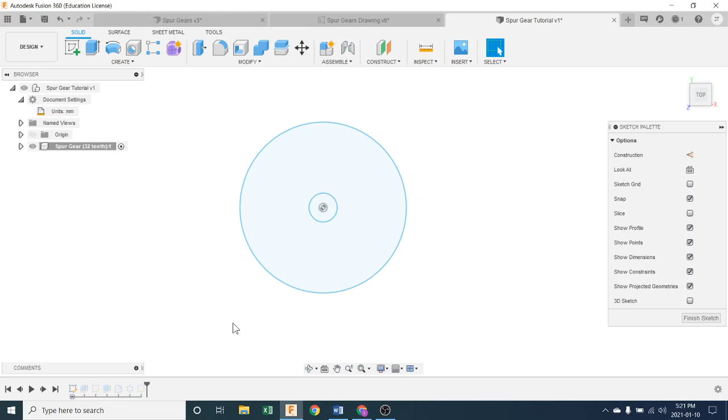Down in your history, yours is probably collapsed, so open up the group for our spur gear. The very first sketch, if you double click it, you can see this is where the circle for the bore was drawn. We're going to hit D on the keyboard and dimension that circle and make it a 6mm circle, since it was supposed to be 6. Hit finish and everything's good now.

Okay, next let's draw a second gear. So how do we do that? Let's look at it from the top, straight at it. Go up to create, then spur gear. Now a couple things we have to change.

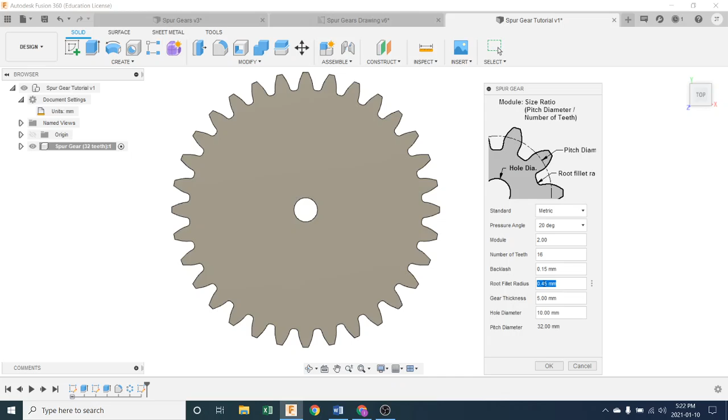The number of teeth is down here. You can see I was already playing with it, but yours would say 32 because that was the last gear you drew. You're going to have to change that to 16. And your last root fillet radius, down here at the bottom of the tooth, was 0.9. It's now to be 0.45 -- 0.9 would probably result in an undercut. So we're going to go 0.45mm and then push OK.

It's going to generate another gear. Now, it always puts the add-in -- it was designed to always place the gear on the origin. We're now going to move the gear into proper position. See, we have two gears over here listed as components.

We're going to right-click on the 16-tooth one, click Move Copy, and then this arrow here would drag it this way. Watch, I'll just pull it off a bit. That's the X distance if we look at the dialog over here. So we're actually going to put it back on origin, so put that back to 0. And the X distance is not going to be something that we just drag -- we're actually going to put the number we need in.

And the number is based on the pitch diameters. So I'm going into these two components over here and turn on the final sketch of each. That's this one, and then make sure it's on for the other one. Final sketch, there we go. That makes our pitch diameters visible, right? Because that last sketch was drawing that pitch diameter reference line.

So back to the X distance here, we're going to make the distance the radius of this gear to the pitch diameter plus the radius of this gear to its pitch diameter. The large gear had an overall pitch diameter of 64, so we're going to say that this is 32. Then we're going to add to it -- Fusion can do math -- hit the plus sign, the half of the pitch diameter of the second gear. That would be 16 because it had an overall pitch diameter of 32.

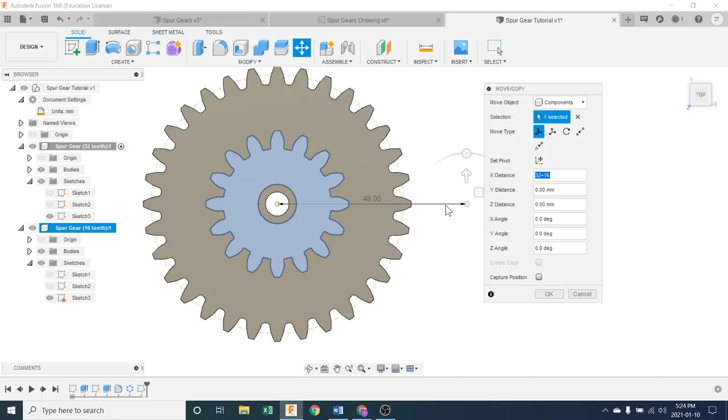So now if I zoom in on this... as you control and scroll, it bounces it around. You can probably see this one's pitch diameter showing pretty light, hard to see, but what it does is it places each one of the pitch diameters on top of each other exactly. So those teeth are now perfectly positioned, which may or may not be good for 3D printing. It is perfectly good for machining, but not great for 3D printing perhaps if it gets too tight, but I think it'll work. So we're just going to say OK.

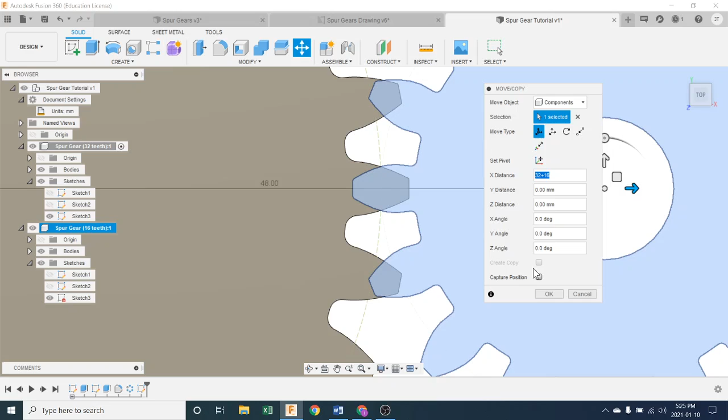Oh, capture position, what the heck? We're not going to say OK yet. We're almost done. Now we have to rotate this gear because you can see the teeth are bumping into each other. We're going to rotate so they fit together properly. So we've moved it in the X direction, and now we're going to rotate it. And it asks for the axis of rotation -- well, this circle will be its axis.

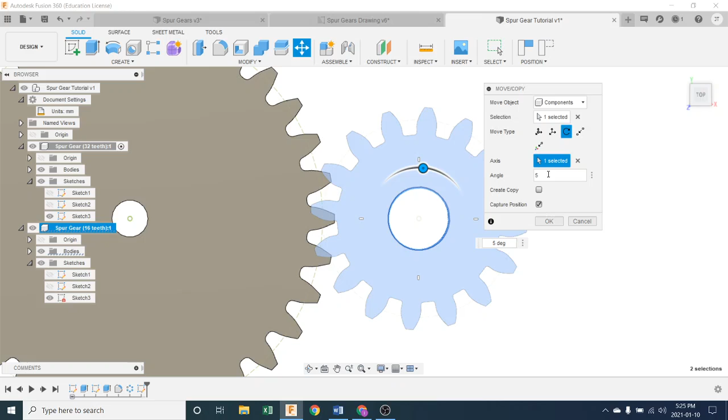You can see we can do a certain number of degrees. What if I just move it 1 degree? You can see it just moves it a little bit. What if I move it 5 degrees? It's starting to get closer. Let's try 10 degrees -- closer still, not quite there. Well, the number you're looking for is 11.3.

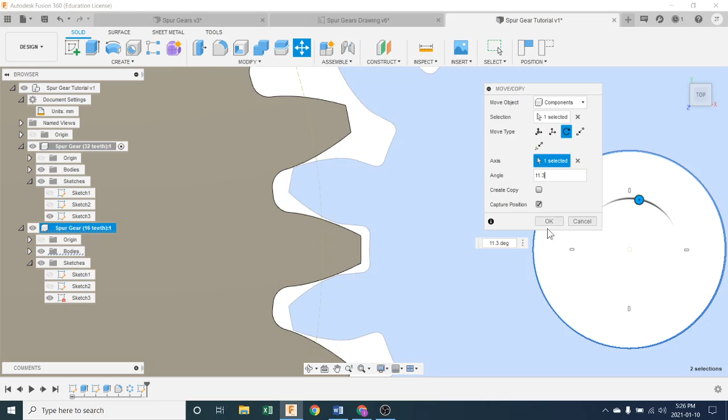And that's just by trial and error. The 0.3 is accommodating the backlash that we put in there, and the 11 degrees is what we needed based on the gears and the teeth we have and the diameters. So basically you would just play around with this angle until they fit just right in between each other, and then you push OK. But in this case, you're just going to put 11.3. Push OK. Okay, so we moved them, we positioned them.

I'm going to go top level here for activate so you can see them both. And I'm going to turn off the pitch diameter. Well, you can see them now -- those pitch diameters are right on top of each other as they come around.

And that is it for making a second gear. I'm just turning some stuff off over here and doing some tidy up, closing my menus. We are ready to build a base to rotate these gears on. See that in the next video.